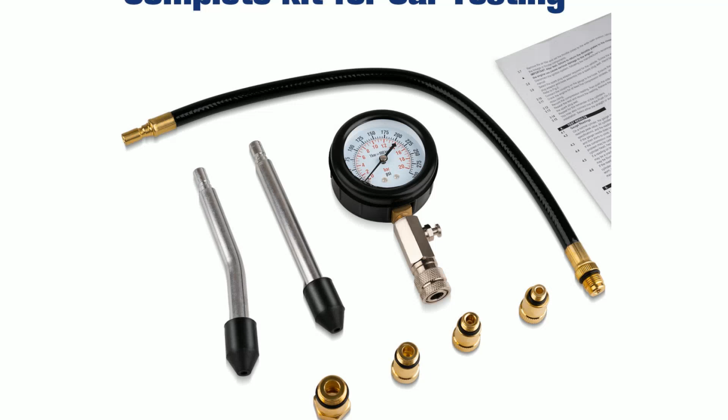How much should you actually spend on a compression tester? People are happy buying the cheap ones but returning the expensive ones.

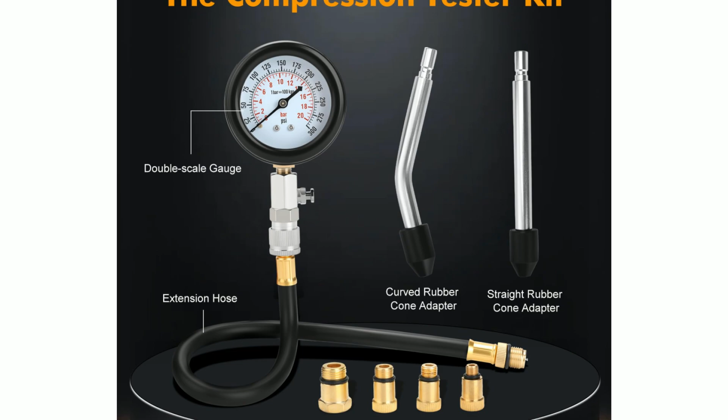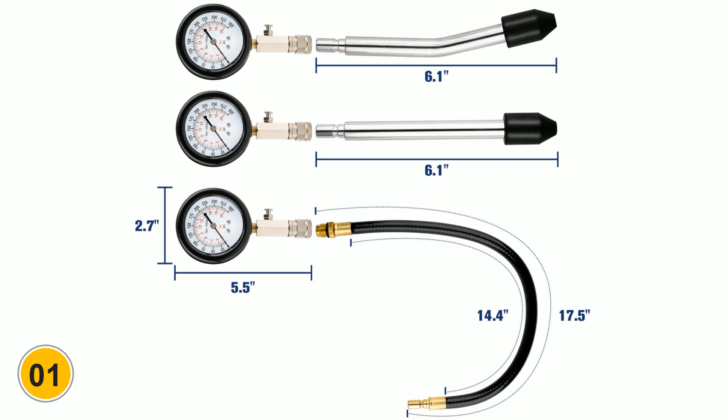It's a bit interesting. Product number 1, Lihub Compression Tester Kit. First up is the Lihub 8 PCS Compression Tester Kit, priced at just

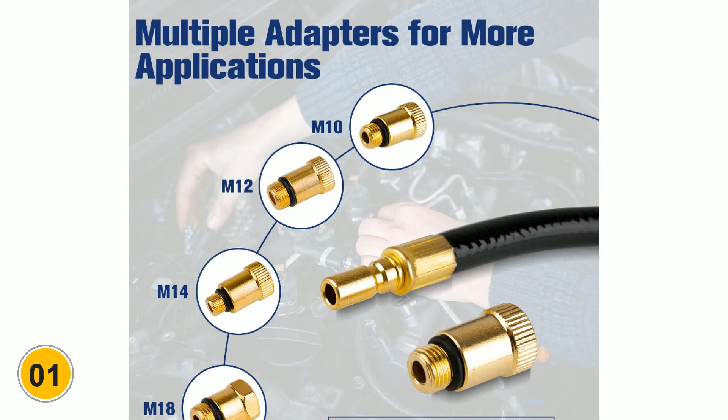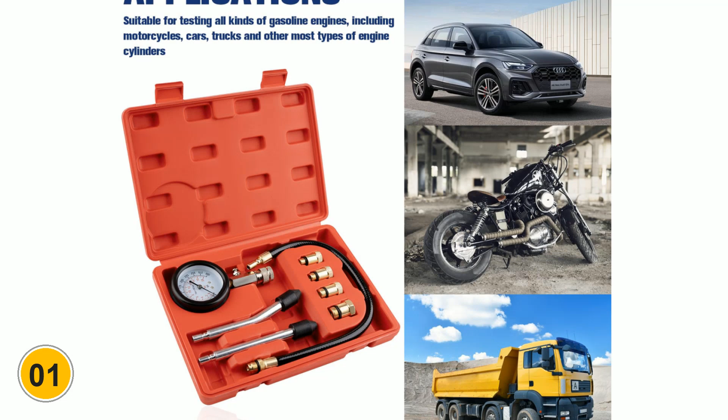$13.99. What caught my attention is its portable design and solid 4.5-star rating from 394 reviews. If you want a budget-friendly option for testing petrol engines, this is worth a serious look. It features a dual-color scale gauge, making it easy to read during tests. The gauge can provide accurate readings that help you quickly assess engine health, a must when diagnosing issues. Plus, it includes various rubber tapers and fittings, ensuring compatibility with a wide range of vehicles.

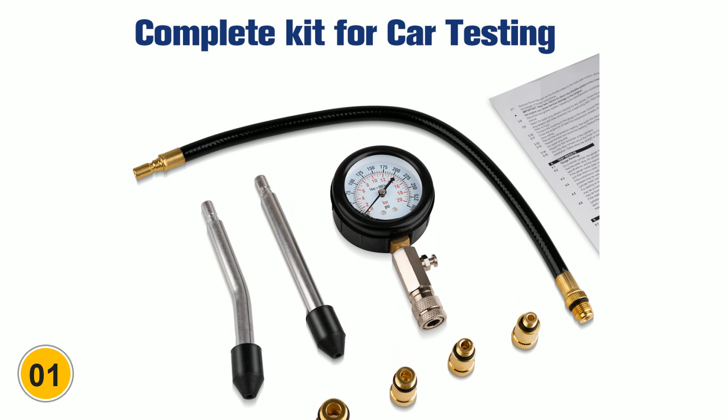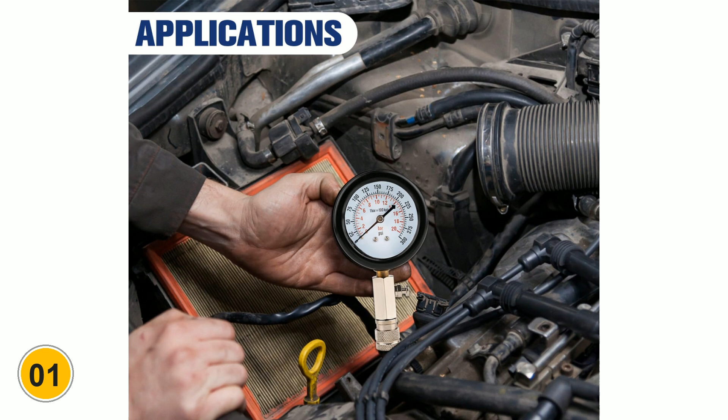Now, I have to be real with you, some users did mention that the quality of materials could feel a bit cheap. But here's the thing, at this price point, it still gets the job done for most DIYers and occasional mechanics, so it might not be a deal breaker. This is perfect for you if you're a casual mechanic looking for an affordable tool. Skip this one if you need something for heavy-duty or professional use. For what you pay, it's a solid value.

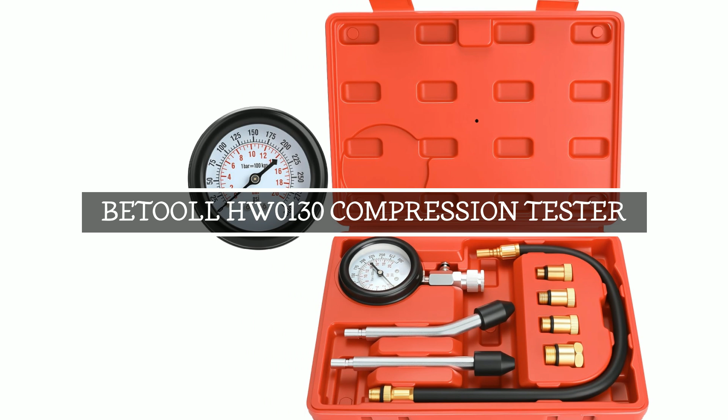Now, if the quality concern with Lihub bothered you, this next one takes a completely different approach. Product number 2, BETOOLL HW0130 Compression Tester. Next up is the BETOOLL HW0130 Compression Tester Kit, retailing at

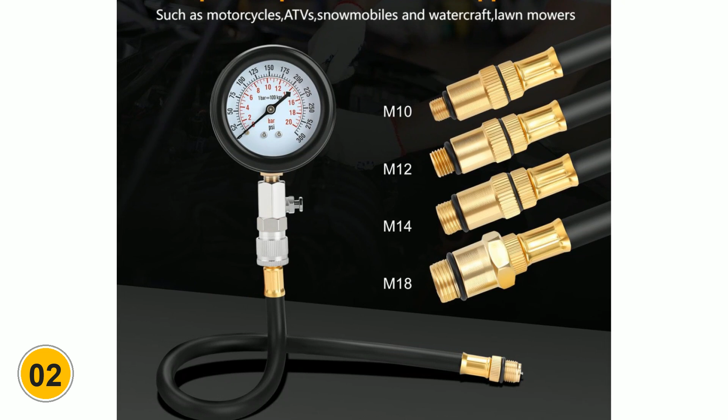$19.99 and boasting an impressive 4.5-star rating from over 8,600 reviews. If you want a reliable kit that's still budget-friendly, give this one a look. This kit allows for quick and accurate compression checks on petrol engines. The 3-inch dual-color gauge is designed for easy reading, showing pressure from 0 to 300 psi. What's cool is the included 17.7-inch extension hose and multiple adapter sizes, making it versatile for motorcycles, cars, and ATVs.

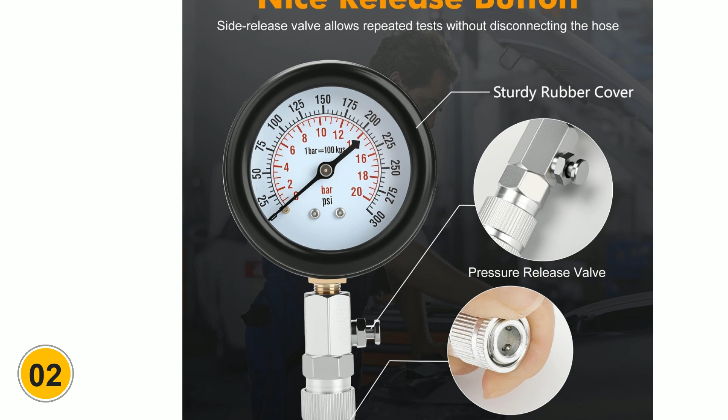Now, some users have found that the rubber cones can sometimes make a loose seal, which could lead to inaccurate readings. But honestly, if you take your time and ensure everything is connected properly, you can still get reliable data. This is perfect for you if you want an easy-to-use tester with lots of versatility. Skip this one if you need something specifically for larger or diesel engines. Overall, it's a great bang for your buck.

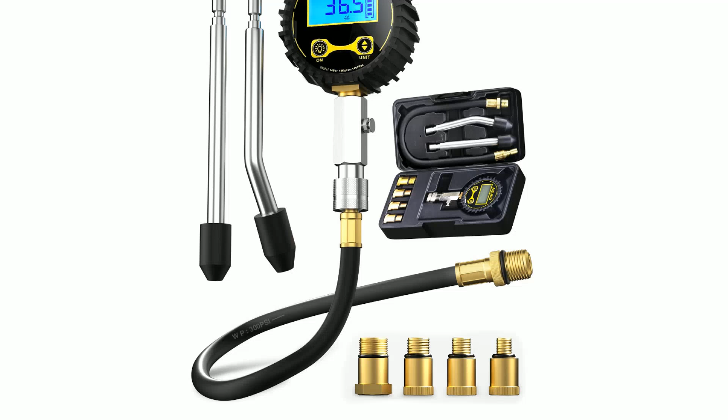Alright, that was a solid option. But the next one on my list might actually be even better for those who love digital technology. Product number 3, AZUNO Digital Compression Tester. The AZUNO Compression Tester is next, priced at $27.99, and it has a solid 4.5-star rating from 1,600 reviews.

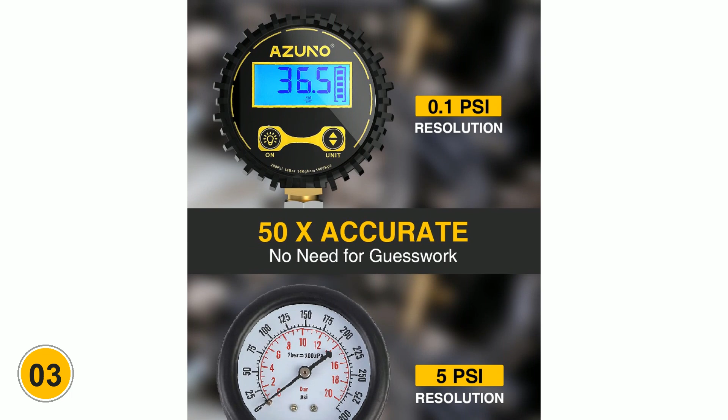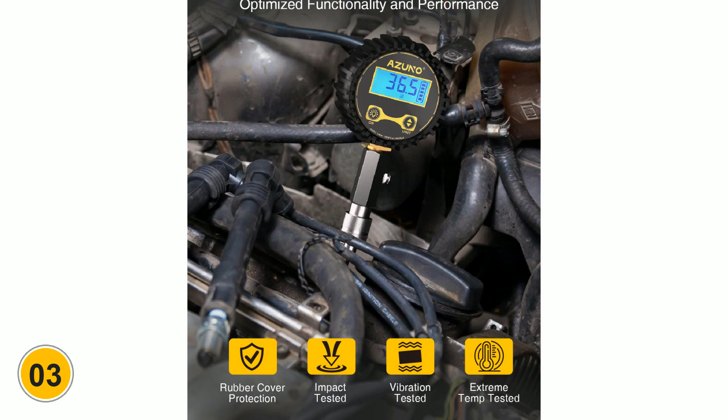If you want precise digital readings, this one's worth considering. This tester features a digital gauge with a display resolution of 0.1 psi, accurately measuring between 10 to 200 psi. Plus, it comes with 4 adapters and a 16-inch flex hose, allowing it to fit a variety of engines.

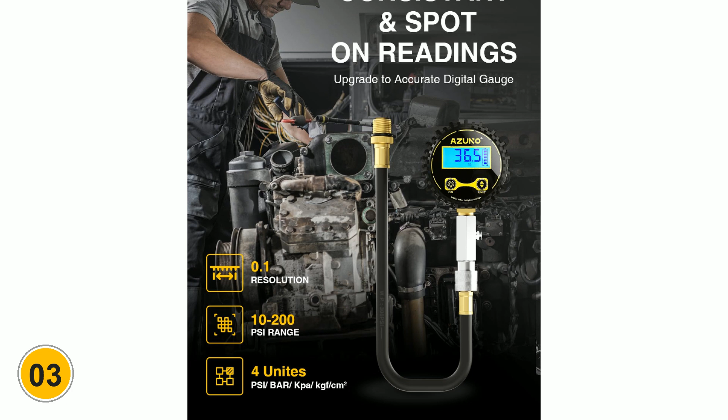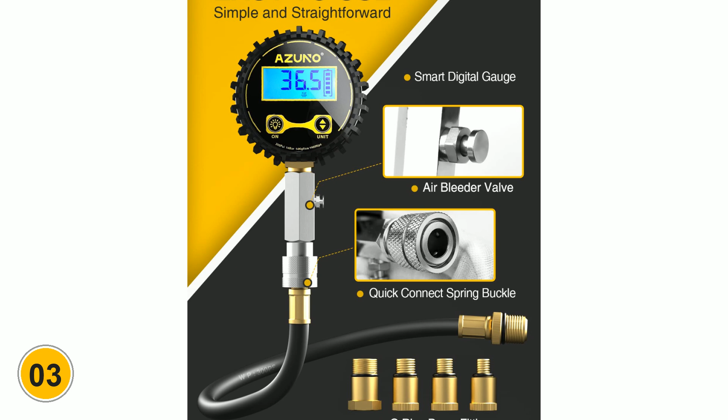One downside is that the setup can feel a bit complicated for beginners. However, if you're someone who enjoys getting into the nitty-gritty of engine diagnostics, this could be a minor hurdle in exchange for its accuracy and features. This is perfect for you if you love tech and need precise measurements. Skip this one if you prefer a simpler, more straightforward tool. For the accuracy it offers, the price is pretty reasonable.

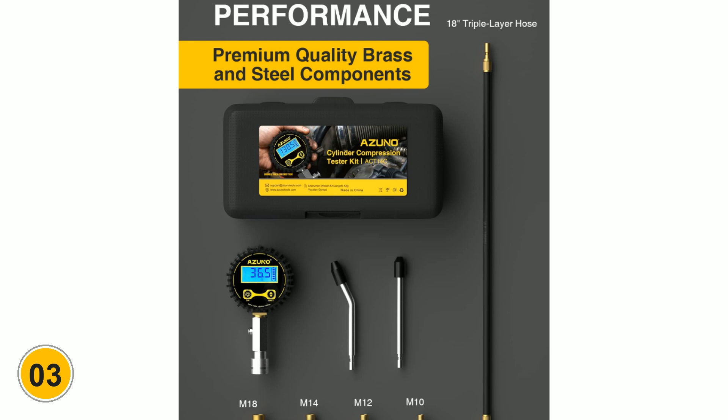Now, if you're looking for something that includes a spark plug tester too, the next product might catch your interest. Product number 4, FIATA Compression Tester Kit. Next, we have the FIATA 9-pieces compression tester kit, which goes for $22.99 and holds a 4.5-star rating from 1,600 reviews.

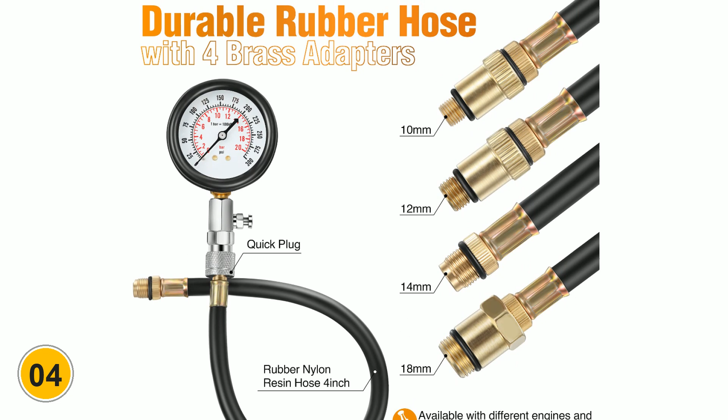If you want an all-around kit for various vehicles, this is a solid choice. This kit includes a variety of adapters, which means you can test gas engines in cars, trucks, motorcycles, and even boats. The gauge is easy to read, with a dual scale up to 300 psi, and the durable materials ensure it can withstand regular use. It also includes a spark tester, which helps diagnose ignition issues, very handy.

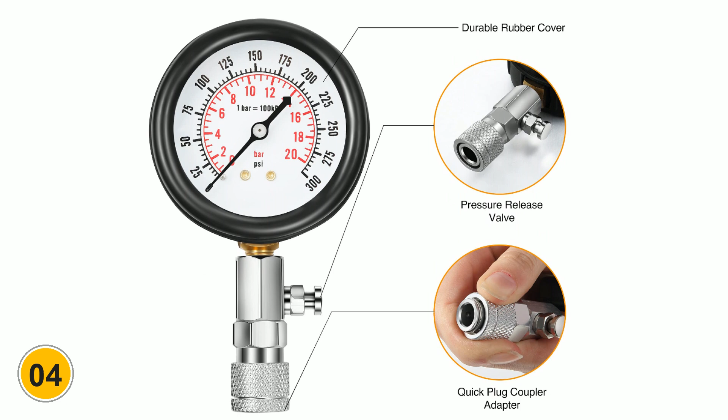However, some users found the instructions a bit lacking, which could make first-time use tricky. But honestly, once you figure it out, it's a versatile and complete kit that can handle a lot of different vehicles. This is perfect for you if you work on multiple types of vehicles. Skip this one if you primarily work on just one vehicle type. You definitely get a lot of value for the price.

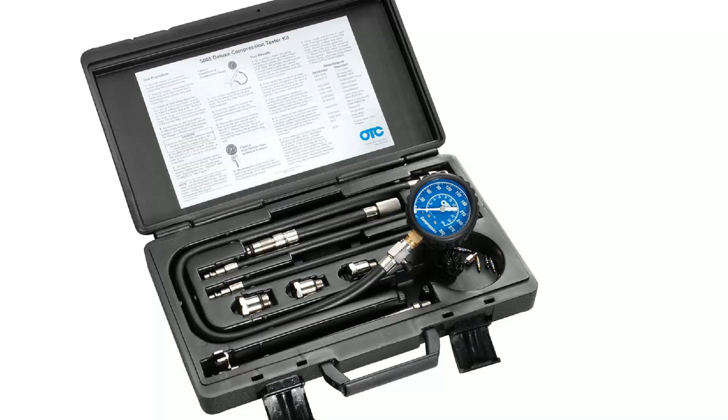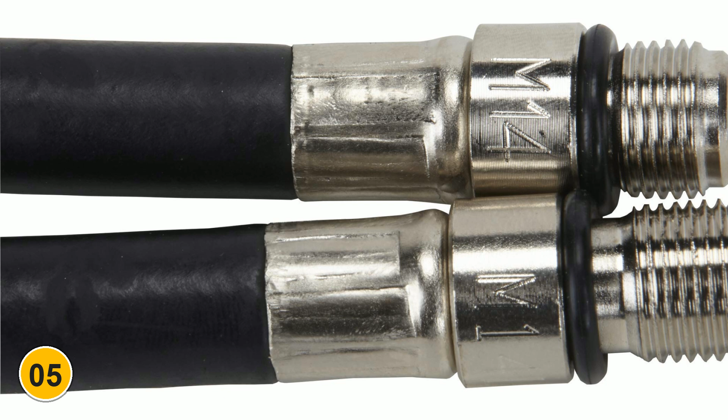Now, if you're looking for a more professional-grade option, let's talk about our last product. Product number 5, OTC Deluxe Compression Tester Kit. Finally, we have the OTC 5605 Deluxe Compression Tester Kit, priced at $117.99. This one has a stellar 4.7-star rating from 1,900 reviews.

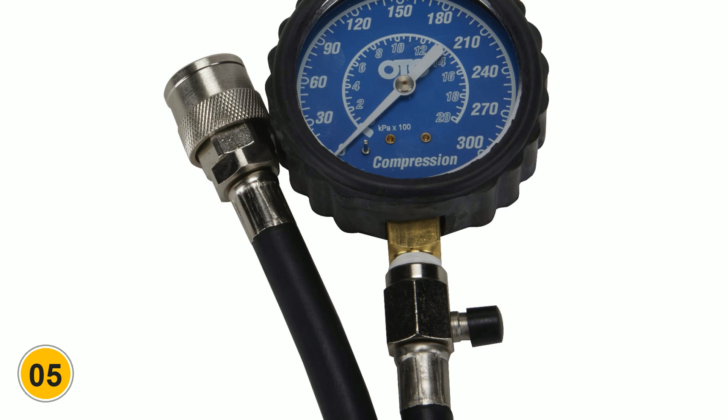If you're serious about your automotive work, this kit is worth your attention. This comprehensive kit features multiple adapters and an extra-long hose, allowing you to access tight spots in the engine. The corrosion-resistant finish on the connectors means you won't worry about wear and tear over time, which is crucial for longevity.

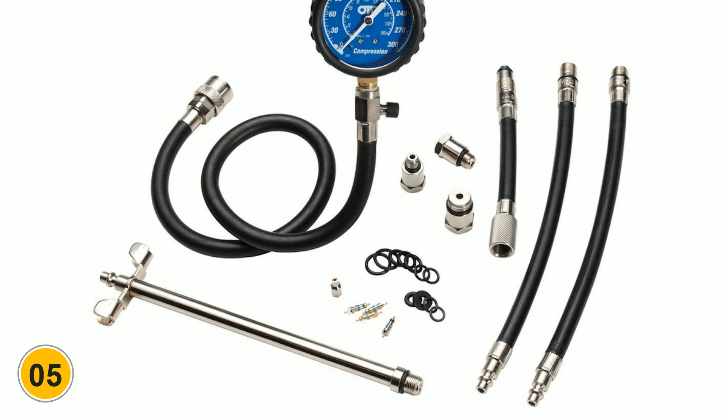Now the price is significantly higher than other options, and some might think it's too much for a home garage. However, if you're a serious DIYer or a professional, the durability and accuracy it offers can justify the investment. This is perfect for you if you plan on using it frequently or need it for professional applications. Skip this one if you're just looking for a casual tool. It's an investment, but for serious users, it's worth every penny.

So there you have it. We've covered 5 compression testers, each with its unique strengths. Whether you're a casual mechanic or a professional, there's something here for you. I hope this helps you choose the right one for your needs.